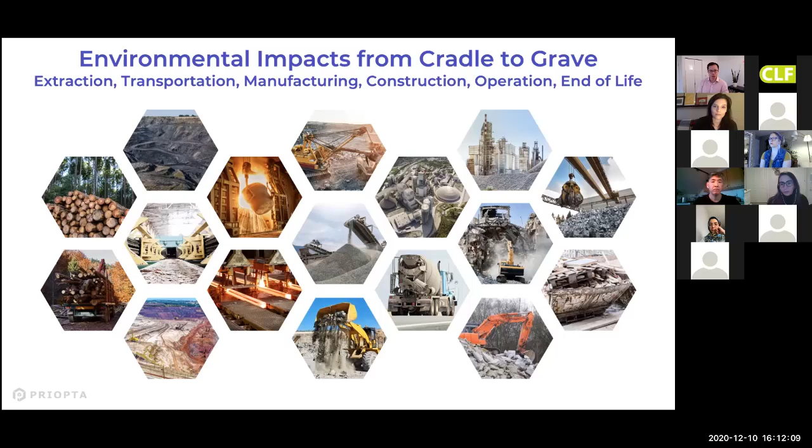These pictures illustrate some of those impacts. What's the impact of mining these resources? What's the impact of manufacturing and processing, et cetera? These are oftentimes hidden - they're not things we observe readily when we're looking at, let's say, a piece of concrete, but there is a whole history to it. How do we account for that?

As I mentioned earlier, the building sector is responsible for about 39 to 40% of global CO2 emissions. If you look at the annual emissions each year, about 40% pertains to this building sector. 28% is to operate all the buildings on the planet - think of what it takes to heat, cool, and operate every building. That's 28% of CO2 emissions. Then think about how much new construction and renovation takes place each year - the embodied carbon emissions associated with all those construction materials for new builds each year is 11% of global CO2 emissions.

This is what I refer to as the blind spot - this 11% slice of the pie. This is what we've historically neglected. We don't typically quantify it on projects, but it is actually extremely significant.

What's interesting as well is that when we talk about embodied carbon, we're talking about concrete, steel, aluminum, and a bunch of other materials. The building industry is a big user of these materials - even just these three, concrete, steel, and aluminum, together make up almost 23% of global CO2 emissions. Obviously the building sector is not the only user; these materials also go towards infrastructure, cars, and other products. But what's interesting is that if we address embodied carbon, we have the potential to affect the supply chains, which then has a ripple effect even beyond the scope of the building sector. If we can get lower carbon concrete mixes, that'll impact infrastructure as well as the building sector, for example.

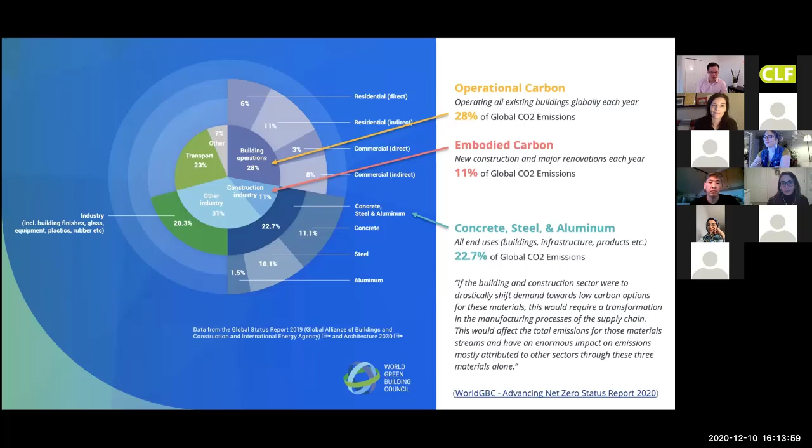If we only look at the new construction taking place each year between now and 2050, over the next three decades, embodied carbon will account for almost 50%, almost half of the emissions associated with that new building stock over that time horizon, with operational carbon being the other roughly 51% of the impacts.

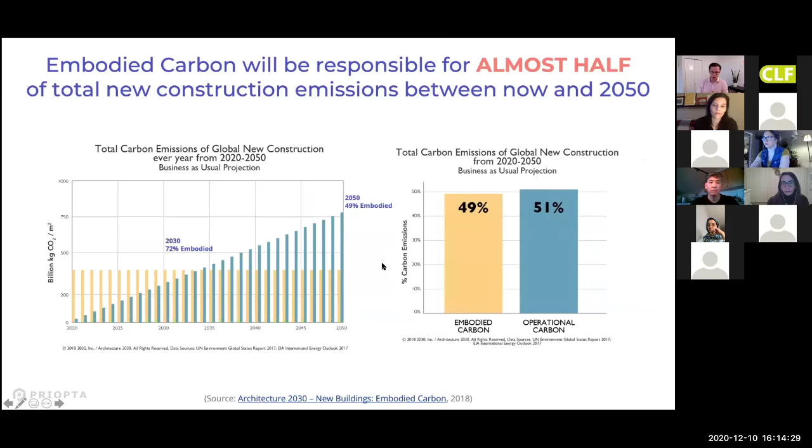So it's clearly a really significant source of emissions, but also important to consider in context is how much new construction we're projected to build. At our current rates, the projection is that we're going to double the current building stock by 2060. In the next four decades, think of all the buildings that exist on the planet, all the square footage of buildings - we're going to double that.

So we can't hit any of our climate targets if we don't address embodied carbon emissions.

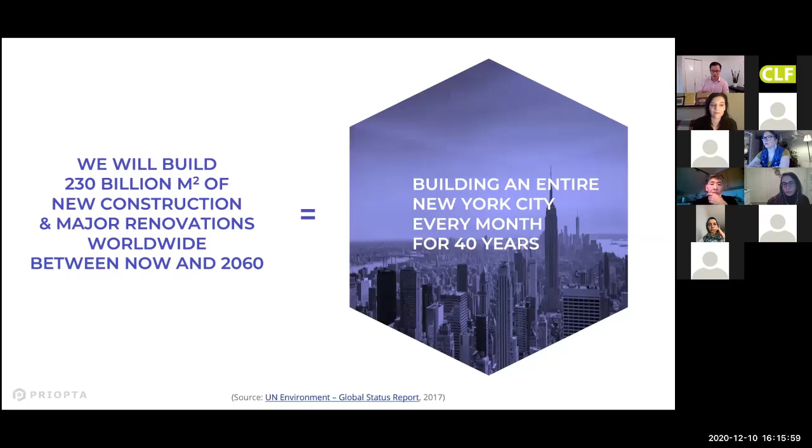So put that in a different context, we're building the equivalent of an entire New York City every month for the next 40 years. So think about all the buildings that exist in New York City, and not just Manhattan, that's all 5 boroughs, something like 5.8 billion square feet of floor area. That's how much we're building every month for the next 40 years.

And so naturally you would think we're obviously using a lot of the material supply in the world. So this is actually a snapshot of how we use resources on the planet. This is the total flow globally, by mass, of what type of resources we use, like minerals, ores, fossil fuels, and biomass, and how that flows to our end uses. So for example, the construction sector accounts for about 44% of the global material use. So almost half of global material use goes towards our buildings.

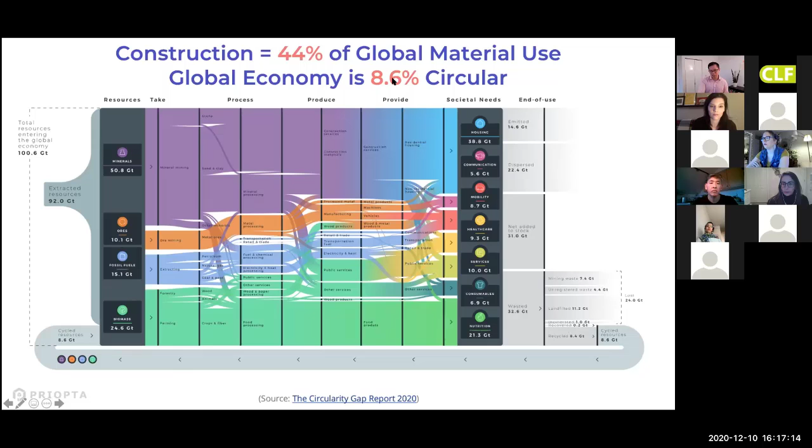And you've heard a lot of talk about circular economy. As a planet, we are about 8.6% circular, meaning 8.6% of the mass of resources comes out at the end of the lifespan and then gets cycled back, either recycled or reused in our society. And so that's a fairly small percentage, and it's actually decreasing because the amount of demand that we have for new construction and new products is outstripping it. So this percentage is actually decreasing every year right now at current rates.

So how does this figure into the global climate targets? If we're going to hit the 1.5 degree scenario target, which a lot of scientists say we should be aiming for from a climate change perspective, that means that this year we need to peak global emissions. By 2030, in 10 years, we need to halve global CO2 emissions. And then by 2050, in 3 decades, we need to get to 0 emissions. And then we need to go negative, which is extremely significant, right?

And to give you a sense of the percentage reduction we need each year, to hit that 1.5 degree scenario target, that's 7.6% per year. To hit the 2 degree target, that's 2.7% per year. Some early estimates back in April, actually even some of the most recent estimates that I've seen for the emissions reduction this year due to COVID, due to all the shutdowns and the slowing of the economy, that's about 7 to 8% this year. So this year we're maybe on track for that 1.5 degree target, but think about what we need to do for each successive year. Obviously these are not sustainable reductions, they're kind of a temporary reduction.

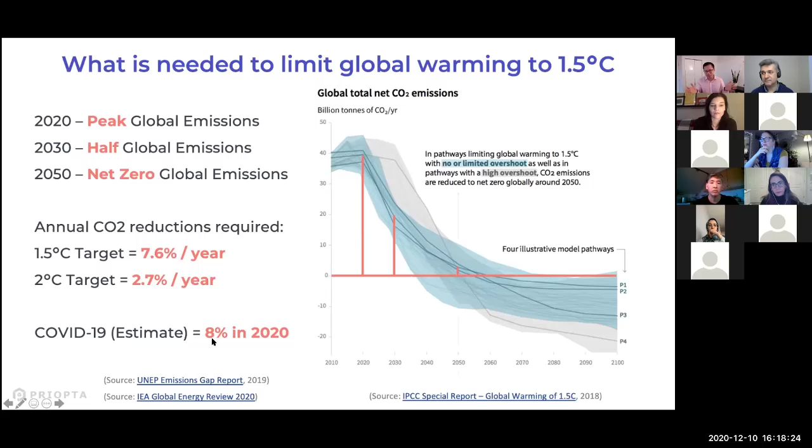And it's important for Canada as well. When we hear about climate change, sometimes we think it's going to impact other places more than us, but actually Canada is warming at twice the rate as the rest of the world. So whenever you hear these scenario targets, like the 1.5 degree scenario for the globe, that's a global average. That means Canada is probably averaging 3 degrees because we're warming at twice the rate as the rest of the world. And that's an annual average. So think about what the monthly variations might be, the peaks and troughs of that. It can be quite significant.

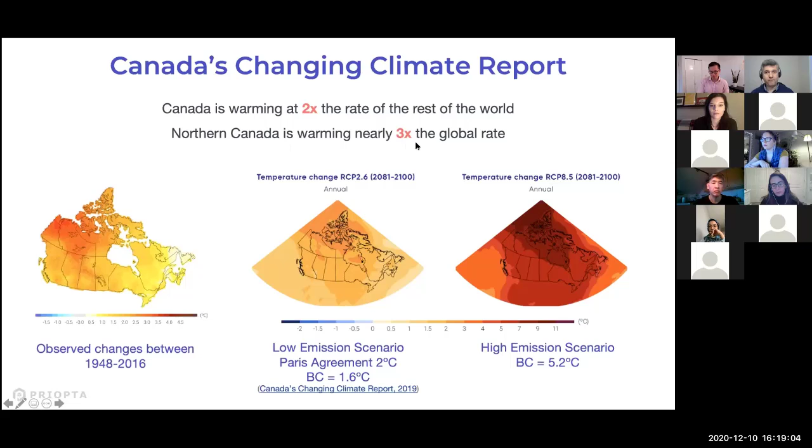So there's big implications for our country. And then especially when you get further into the north, like the northern Canada region, it's warming at 3 times the rest of the global rate. So that's kind of the global context for why we need to address embodied carbon.

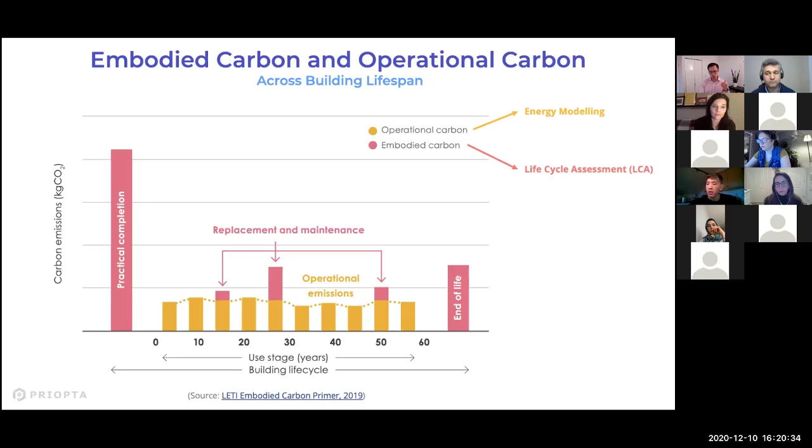And to quantify the embodied carbon, that's where we use life cycle assessment. So LCA is kind of analogous to energy modeling. You need to add these 2 scopes of emissions to get the holistic picture of the total emissions for your building. And when we're looking at life cycle assessment, you hear a lot of talk about embodied carbon, but in an LCA, we actually look at multiple environmental impact categories, not just carbon emissions.

And so we look at global warming potential, GWP, which is oftentimes referred to as embodied carbon. So that's the main figure that a lot of people pay attention to. But we also look at things like acidification potential, eutrophication potential, smog formation, depletion of non-renewable energy, and ozone depletion. So when we do an LCA, we quantify these other environmental impacts as well.

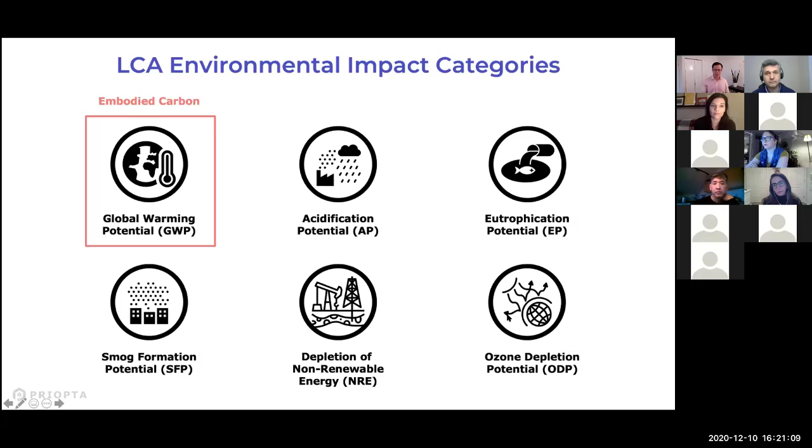I mentioned earlier about all those life cycle stages. So there's formal definitions for what each of these life cycle stages are. So broadly speaking, module A is the upfront carbon. So that's all the emissions before the building gets occupied. That's everything from raw material supply, so that's like the harvesting of timber, the mining of ores, then the transportation to the manufacturing facility or processing facility, and then transportation from there to the construction site and any emissions associated with the construction and installation. So that's A1 to A5.

And then the B stage is during the use phase. So if there's any emissions associated with, for example, refurbishments and replacements, that's what we account for there. And then at end of life, anything from demolition, deconstruction, transportation, waste processing, disposal.

Sometimes you'll also see LCA results that mention module D, which accounts for reuse and recovery and recycling. Those are benefits that are beyond the boundary of your individual building. So if, for example, you want to account for reuse for the next building or recycling benefits, or let's say you're incinerating some material and you're offsetting fossil fuel energy, for example, how do you account for those benefits? That's in module D, but we typically report that separately as additional information.

And if you combine the LCA results on the material side, plus the operational carbon, that's B6, that's the energy modeling results, for example, or your utility bills, those two combined together, it gives you your whole life carbon.

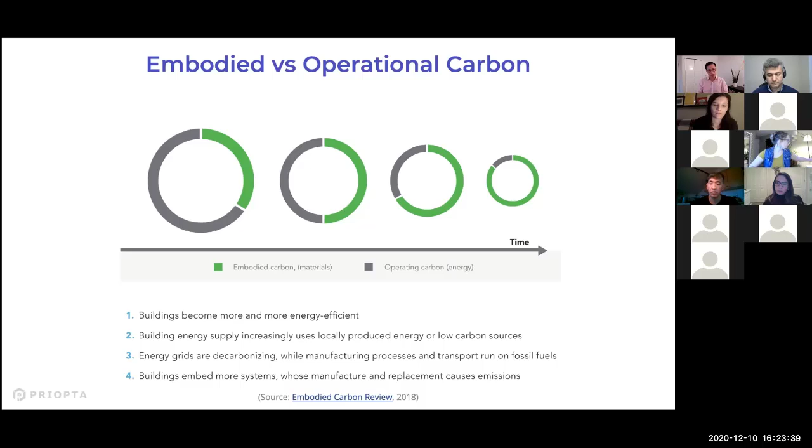So let's put some numbers to it. In BC, we have a fairly clean electricity supply. It's mostly hydro. So from a carbon intensity standpoint, it's very, very low. And so if we electrify our buildings in BC, we can actually have really low operational carbon emissions. And so you may have heard of the BC Energy Step Code. As you get to higher steps, we get more energy efficient buildings.

But this was a study done by Integral Group where they looked at part 3 buildings, so larger buildings beyond 600 meters squared. For these buildings, they actually looked at natural gas systems versus electric systems. And you can see our electric systems are really low. It can be as low as 1 to 2 kilograms of CO2 per meter squared per year.

And we have various different limits within the City of Vancouver, for example, in our rezoning requirements that limit the operational carbon greenhouse gas intensity. So those are really low numbers, right? And let's say a typical building in Vancouver maybe is more in the range of 20 kilograms of CO2 per meter squared.

So something that maybe uses natural gas and is not particularly energy efficient, that might be in the 20 range. But we can see there's big variations. Let's say a baseline building in Calgary could potentially be like 71 kilograms of CO2 per meter squared per year. So every year to operate the building, let's say something in that range, right?

In Calgary or in Alberta, there's a lot of natural gas heating. Also, the electricity grid is much more carbon intensive. There's a lot more coal use and natural gas use. So that changes the picture quite a bit. Plus, the climate is also much colder there. So that also affects things. So we can see, even on the operational side, it can vary a lot.

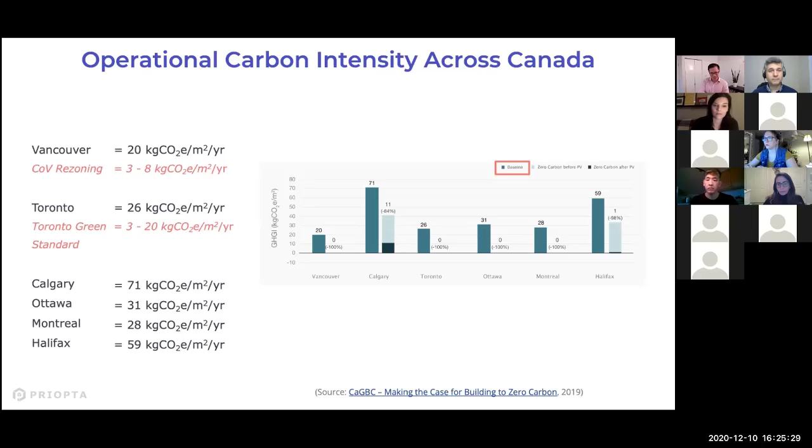I've seen numbers higher than 100 kilograms of CO2 per meter squared per year. And then it can be as low as like 1, right? Like in BC. So just to give you a sense of how big that range can be. And as I mentioned, the electricity grid carbon intensity is a big factor of that. So let's say in Alberta, the average carbon intensity of the grid is around 800 grams of CO2 per kilowatt hour. Whereas in BC, it's like 10 or 12 grams. So big variation there.

And so the electricity carbon intensity has a big impact on the operational carbon intensity of a building, but it actually also affects embodied carbon as well. Because if you think about the production processes for many different materials, some of them are very electricity driven. And so then the carbon intensity of the electricity grid will affect that a lot.

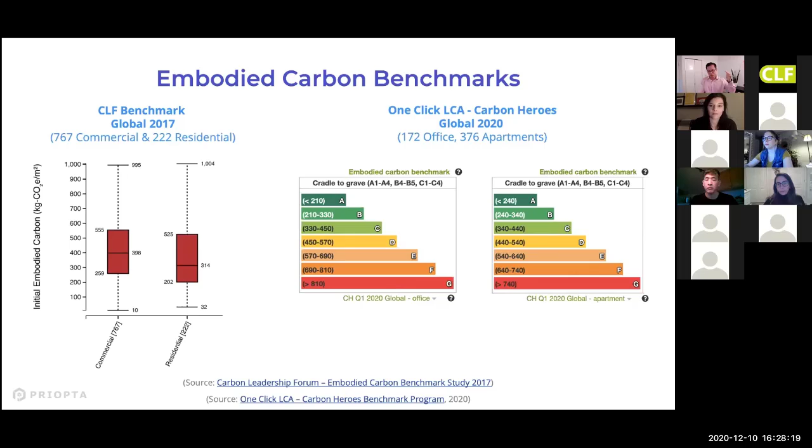So next, I'm going to talk a bit about policies and standards. So what's the imperative for actually addressing embodied carbon?

We see that around the world, whether it's voluntary green building rating systems or regulations, there are many systems actually addressing embodied carbon in some form. Some just require disclosure, reporting of the emissions. Some actually have reduction requirements. What I see generally from a policy perspective, or even in voluntary rating systems like LEED, is there's two different scales at which they apply when it comes to embodied carbon.

One is the whole building level, looking at your whole project: what's the total emissions and how do you reduce it? Can you reduce by a certain percentage relative to some baseline? There's a whole series of credits within LEED or requirements like the City of Vancouver's policy at that whole building level scale. Then there's a range of other policies that address things at an individual material or product specific level, and how we quantify those emissions is through environmental product declarations.

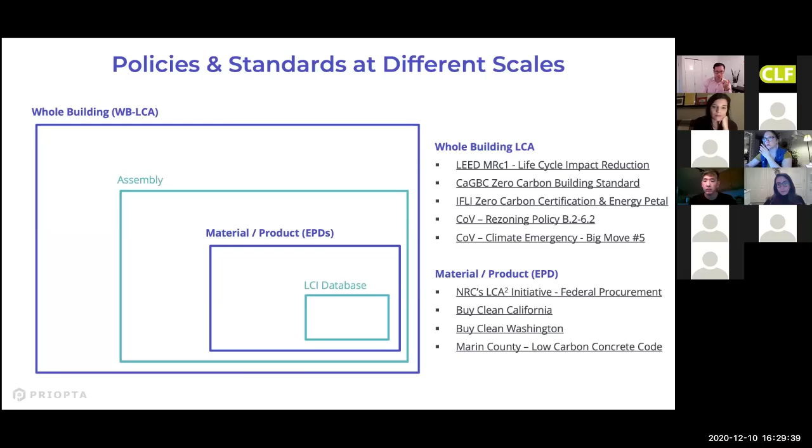If you're not familiar with that, EPDs are basically like food nutrition labels applied to products. In the same way a food nutrition label might say what's the health impacts associated with each serving size of a food product, EPDs report the environmental impacts per unit of a product.

So basically what's happening is, let's say I'm a concrete manufacturer or supplier. I want to do a life cycle assessment of my whole supply chain and my specific concrete mix. You can do an LCA, it's third party verified, and then they produce this document, which is published. Then you can actually see what the environmental impact, for example the carbon emissions per meter cubed of concrete, is for them. So that's what an EPD is - it's a reporting of the emissions associated with individual products.

So there's a suite of policies that tackle things at that level. For example, Marin County has a low carbon concrete code. There's a Buy Clean California policy as well that addresses a few categories of materials in California. There's similar efforts being pushed for in Washington, Buy Clean Washington, and even in the government of Canada, I think they're starting to think about procurement requirements at the individual material level.

So here in one slide, I'm trying to summarize some of the key ones that I think are relevant in Canada or that you may come across.

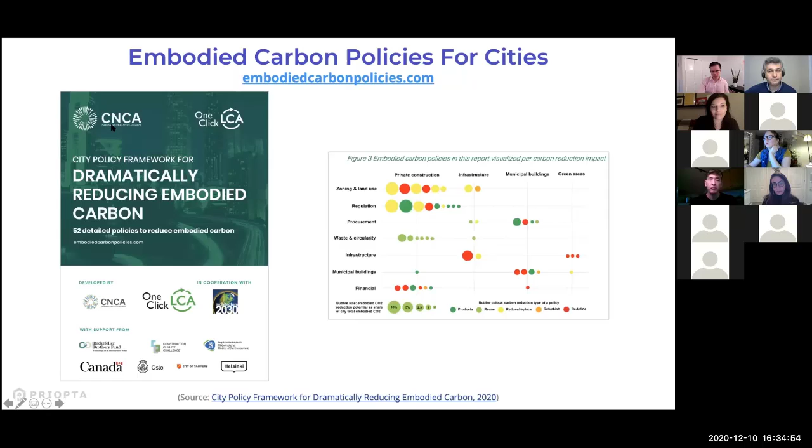Another resource - I actually think regulation and policy is one of the biggest drivers for addressing embodied carbon. So if you are working at a municipal, provincial, or federal government level, I highly encourage you to look at embodied carbon policies. It's a big source of potential reductions. If you have connections to people working in these various levels of government, you can send them this document. I think this document is actually really amazing. It was put together by the Carbon Neutral Cities Alliance, One Click LCA, and Architecture 2030.

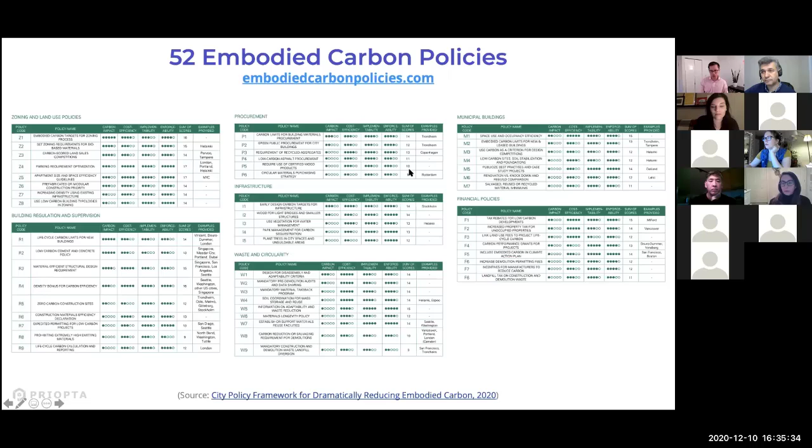What they've done is evaluate 52 different embodied carbon policies, and they have sample policy language. Where relevant, they also cite different cities around the world that have applied these types of policies. They affect policies at various levels: zoning, building regulation, procurement, infrastructure, waste and circularity, financial policies, or municipal buildings. So there's a whole suite of potential policies that may be relevant and can be adapted for each city. I highly encourage you to go to embodiedcarbonpolicies.com, download it, check it out, or share this with any government officials you know who may be interested.

Okay, now I'm going to talk a bit about LCA software tools, which is how we quantify these embodied carbon emissions. There are three main ones typically used in the industry, at least in North America. One is Athena, Impact Estimator for Buildings. It's a free tool, you can download it. It's Windows desktop software, and it's great for early design.

Let's say you just have PDF drawings, you do some simple area takeoffs. You can input those takeoffs into this tool and build up different assemblies - different wall assemblies, different floor assemblies - and do a whole building LCA that way. Especially at the early design stage, if you're trying to compare between different design options, I think this is actually a really great tool, and it's been an invaluable resource, especially given that it's free and freely available. It has mostly industry average data, so it doesn't really have manufacturer specific EPD data, but they do have industry averages for example, for concrete or wood.

Next we have Tally, which is a Revit plugin. So if you have a 3D BIM model of your project in Revit, this can be a helpful tool. Because it's a Revit plugin, you can map directly the different elements within your Revit model to the big database of embodied carbon emissions related to various materials in Tally's database. The downside is that because it's only a Revit plugin, if you don't have a Revit model, you can't do an LCA for your project. Or at earlier stages, if you don't have the Revit model yet, that also limits your ability to do an LCA. If you're trying to compare between different assemblies, you'd have to model it in Revit in order to map it and produce a result. So it's a bit more challenging in that sense, but it's potentially more accurate, especially at later stages, because you have a more detailed bill of materials.

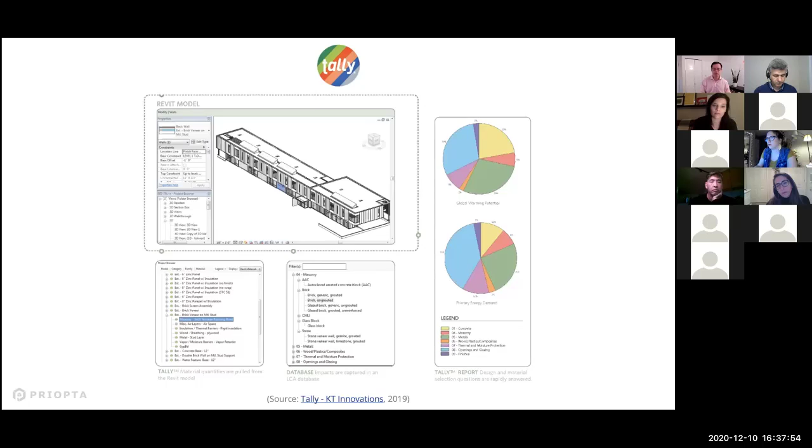Athena does not have a Revit integration, however they do have a spreadsheet import process. And then finally there's One Click LCA. I should mention Tally is a paid license, I think it's like $1,000 per year, plus you need the Revit license as well. One Click LCA covers the broad range of stuff - you can import data through spreadsheets, you can use BIM models, and it has both industry average data and manufacturer specific EPD data. So it's probably the biggest database of materials out there.

And then you may have heard of EC3, which stands for Embodied Carbon in Construction Calculator. It's a free open source database of all the publicly available EPDs. They have both industry average and manufacturer specific EPD data, somewhat similar to One Click LCA as well. However, this is not a whole building LCA tool in and of itself. For one thing, it only quantifies carbon emissions. It doesn't do the other environmental impact categories. And it's really meant more to inform tendering stage decisions, where you're comparing, for example, between different concrete mixes from different suppliers.

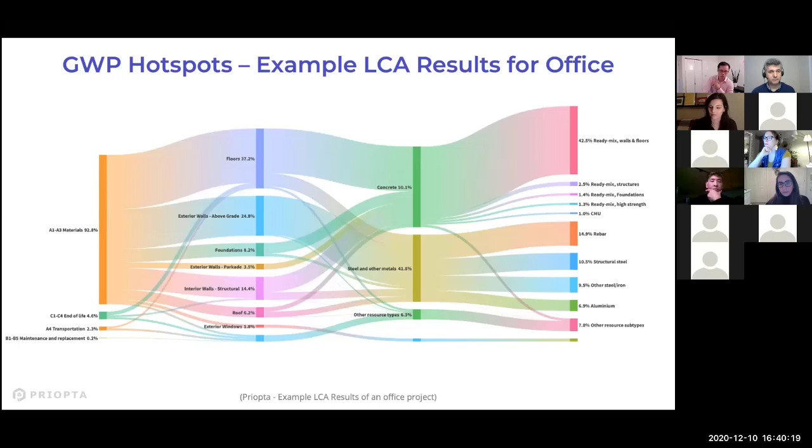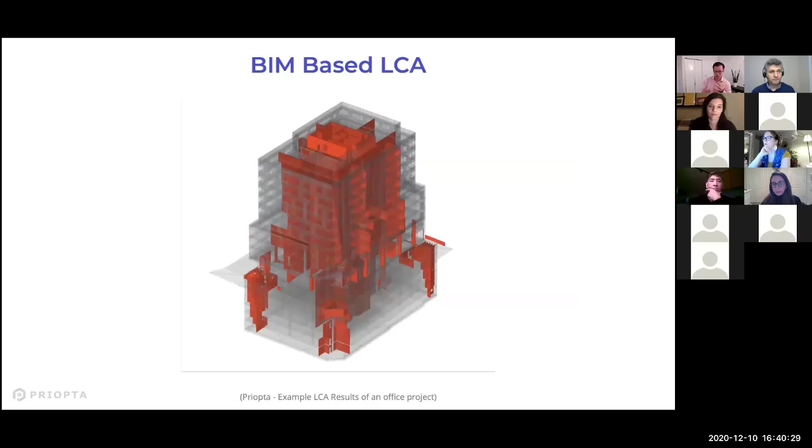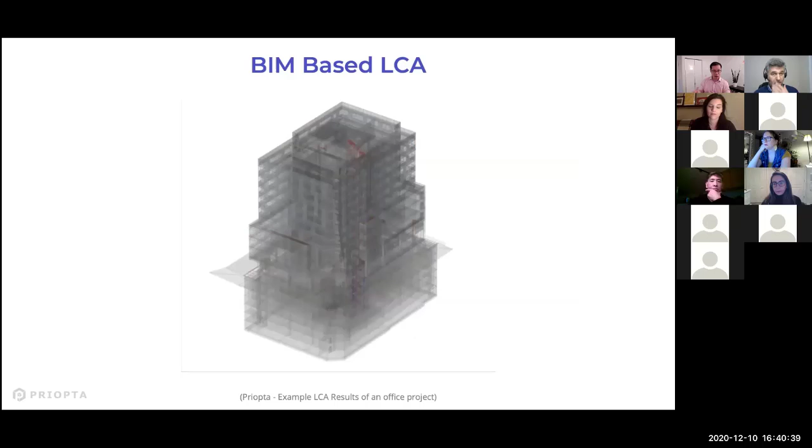So this is just a video of how working with a BIM model can be really helpful, but it also requires a lot of cleaning up sometimes. And depending on the quality of the Revit model, it sounds good in principle, but it can actually be more complex than you realize to accurately account for all the quantities. And some things may or may not be reflected in your Revit model, so it's something to watch out for.

Okay, so that's how you calculate it. Now I'm going to dig into how we reduce emissions, and I'm going to go through material by material, a lot of the key material categories where we have potential to reduce emissions.

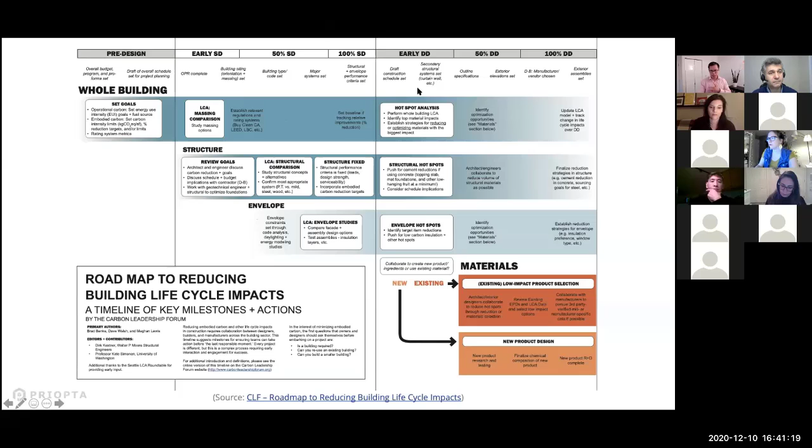Before digging into each of the individual materials, I encourage you to check out this document. This is from the Carbon Leadership Forum. It looks at how do we integrate LCA into the design process. So what happens at schematic design? What are the types of questions you should be asking on the structural side, on the envelope side? And then what are the considerations you should look at during design development or construction documents, during the tendering or bidding phase, and then during actual construction. So yeah, I just think this is a pretty well outlined roadmap. That's a great resource.

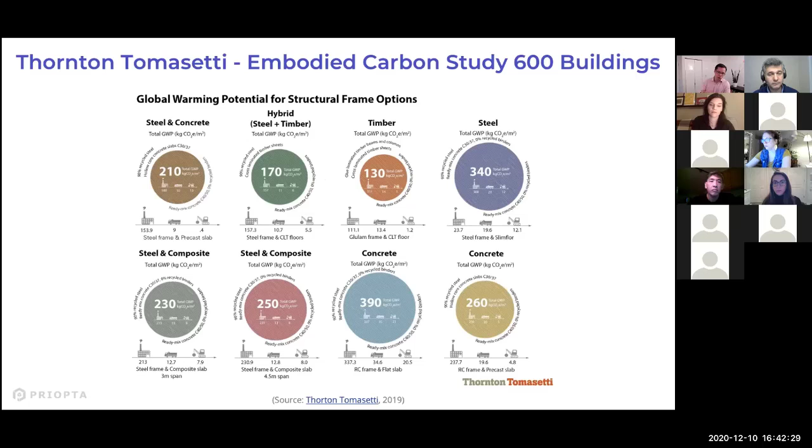So these are all the key categories I'm going to be going into.

Let's start off with concrete. The most emission intensive portion of concrete comes from cement. Cement is kind of the binding or glue of concrete, and it makes up about 10 to 11% of the concrete mix, but accounts for 80 to 90% of the overall carbon emissions of a concrete mix. So anything you can do to reduce the amount of cement content in concrete can have a correlating effect on reducing emissions of your concrete mix overall.

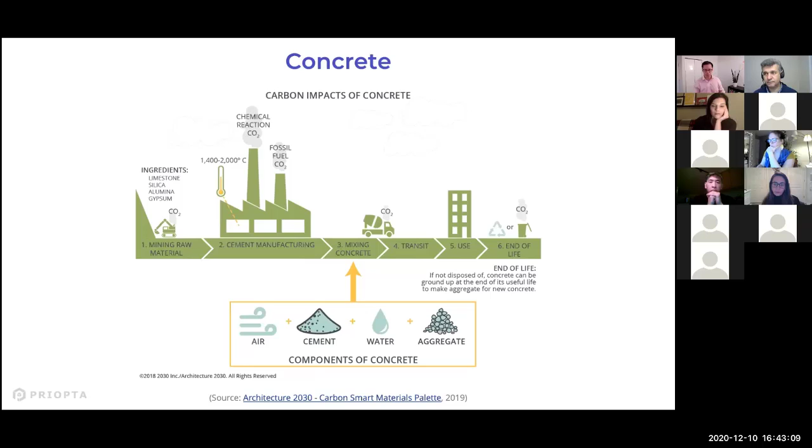So what are some of the key strategies? One low-hanging fruit is to use Portland limestone cement instead of regular Portland cement. Essentially they're adding a bit more limestone, reducing a little bit of the cement content, and that can lead to roughly a 10% reduction in embodied carbon.

Then you can look at things like supplementary cementitious materials, such as fly ash and slag, which can displace a little bit of the cement that's used. Roughly every 10% increase in SCM content can lead to roughly a 7% reduction in embodied carbon. Obviously you have to do the actual calculations, but this is just based on some of my high level rule of thumb analysis.

You want to go for performance-based specifications and avoid prescriptive specifications. Sometimes on projects you might have prescriptive specifications, like needing a certain minimum cement content, a maximum water to cement ratio, or a maximum SCM content. These things can sometimes prevent a ready mix supplier from reducing the emissions of the concrete mix they're delivering.

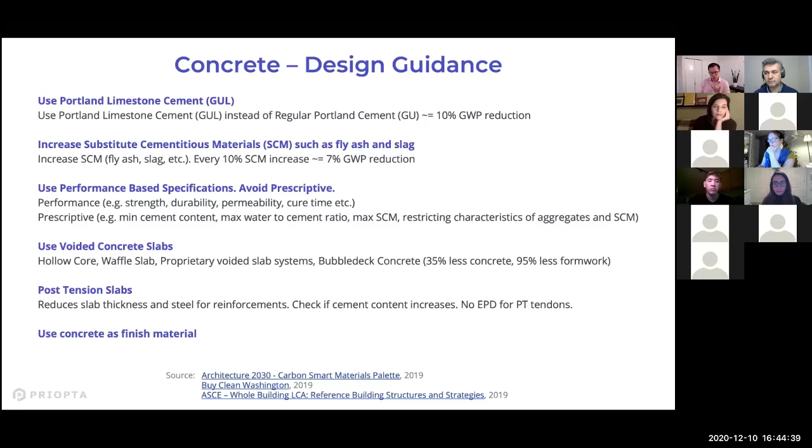You can use less concrete in your slabs, for example. Explore options like hollow core, waffle slabs, or Bubbledeck, which basically just reduce the amount of concrete in there. Sometimes post-tension slabs, which reduce the thickness of the slabs by using post-tension tendons, can also potentially reduce emissions. So those are a few strategies you can apply relating to concrete.

So there is potential to reduce a lot of emissions, and you need to optimize this for each element of the building—how high can you go on the SCM content for your foundation versus your above grade slabs versus your columns. That's something to discuss with your structural engineers and your ready mix suppliers.

Next up is steel. There are two main ways of making steel: basic oxygen furnace, which is much more emission intensive, and electric arc furnace, which is lower emissions, maybe roughly half. In the basic oxygen furnace, it's mostly virgin iron ore with very little recycled content, maybe 25% or less, and it accounts for about 71% of global steel production. Most steel, especially in Asia, is produced using BOF steel mills.

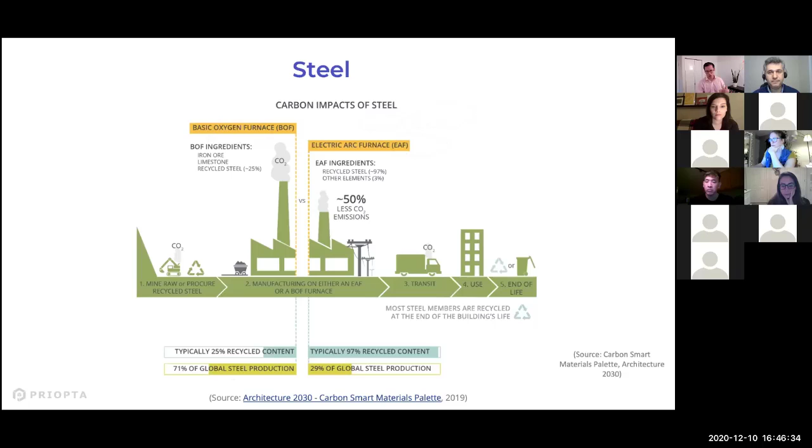Electric arc furnaces use a lot of recycled content, typically around 97%. Because it's an electricity driven process, it can really reduce emissions depending on the carbon intensity of the grid. If it's produced in a state or province with very low carbon intensity in their electricity grid mix, that can have a corresponding impact on the carbon intensity of the steel they produce.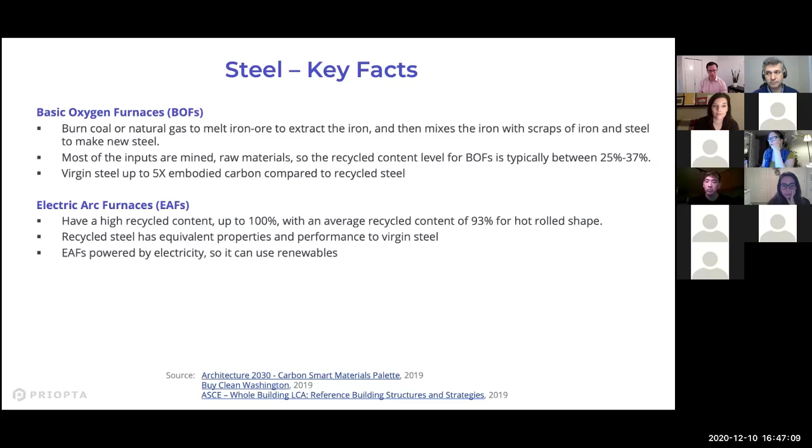So just generally speaking, try to understand where your steel is coming from and what process it was made in, and if you can, try to find electric arc furnace steel. Although the caveat here is that we're limited with how much recycled content steel there is, so it doesn't necessarily solve the whole problem. We still need to address how to reduce emissions in basic oxygen furnace steel as well. There are some new innovations coming online, maybe at research scale—I don't know if it's quite at commercial scale yet, but a lot of people are looking at how to reduce emissions of steel.

I'm going to jump past this.

Wood, generally speaking, when we do LCA studies, typically shows lower carbon emissions compared to steel or concrete structures. You'll oftentimes see case studies that compare wood buildings versus concrete buildings and what the percentage reduction is. It's very case specific—it depends on the building archetype and the specifics of the case study.

But also when it comes to wood and biogenic carbon—carbon relating to biomass, so things like wood or even fast growing materials like hemp—it can be a little tricky in terms of how we quantify those emissions. I'm not going to get into the details, but sometimes these studies account for a negative credit for the storage of carbon in the wood. So it's important to understand the assumptions of that analysis—did it account for negative carbon storage, since different LCA software tools have different assumptions around this.

I actually did a full presentation just on this topic, which is on our CLF Vancouver YouTube channel, which you can search up if you're interested in learning more. It's a pretty complex topic, but generally speaking, when we're doing LCA studies, it does show relatively lower emissions, but we need to ensure it's coming from sustainable forests, or that the forests are sustainably managed.

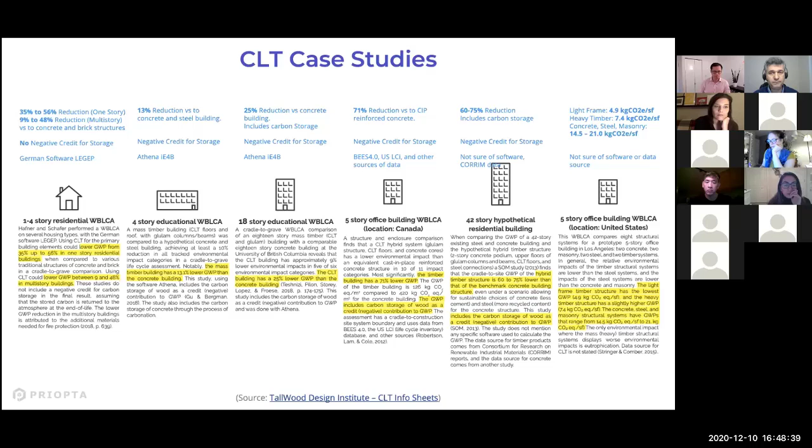Next thing is aluminum. Aluminum is an extremely energy intensive material—it uses 10 times more energy to produce than steel. And it's an electricity process, so even more so, it matters what the electricity source is when it comes to aluminum production.

What's interesting is actually Canada has the lowest carbon aluminum production in the world. We are the 4th largest producer, and because we use the latest generation of technologies in our aluminum production facilities, and where we produce aluminum—like in BC or in Quebec—there's a lot of hydroelectricity. So the carbon intensity is really low as well. Generally speaking, we have extremely low carbon intensity aluminum relative to the rest of the world.

That said, it still is very high—it's still a very high emission intensive material because it uses like 10 times more energy to produce. And there's not enough recycled aluminum to go around to meet global demand, so primary aluminum production, similar to steel, still does matter quite a bit. In your LCA studies, you'll notice that aluminum can actually be a fairly significant factor, especially when we're talking about facades or curtain wall assemblies. The aluminum used in the mullions can actually be really high impact, or aluminum framed windows—that's something to consider from an embodied carbon perspective.

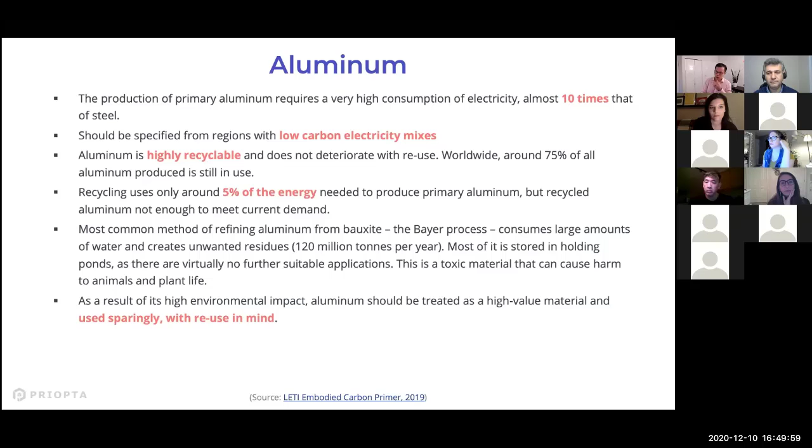Glass definitely still has an impact, so it's worth looking at, but it's not necessarily the biggest impact sometimes, even though there's quite a bit of glass that's used. But the framing options can really impact the performance on that front.

One note I'll say is that when it comes to analyzing things relating to the envelope, there is an interaction between operational carbon emissions and embodied carbon emissions, and you need to figure out what the balance is. As you saw earlier, the trade-off in Alberta is probably very different than in BC because of the operational carbon intensity. So you don't want to just optimize embodied carbon for the sake of it and neglect operational carbon, for example.

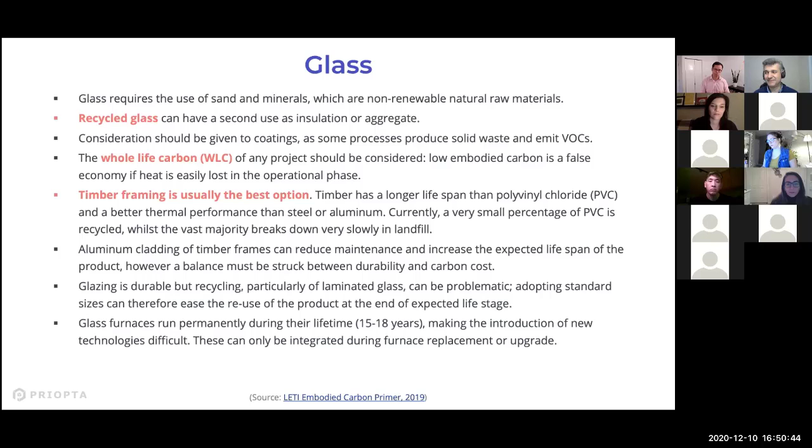Insulation is another one of those things that we need to do that trade-off analysis in. In particular, I want to draw your attention to XPS and spray foam insulation, which has fairly large embodied carbon emissions, mainly due to the blowing agents used. At least currently, they use HFCs, hydrofluorocarbons, which are like refrigerants—thousands of times more impactful than CO2. So small trace releases of these gases can have a huge climate impact.

That's why you can see the emissions I'm showing you across many different types of insulation—XPS, spray foam, EPS, polyiso, mineral wool, fiberglass, cellulose—many different types of insulation from R5 to R60.

You can see XPS and spray foam just by the yellow bars, they're very, very high. Sometimes they're almost like an order of magnitude higher. So it's important to look at the blowing agents in the insulation.

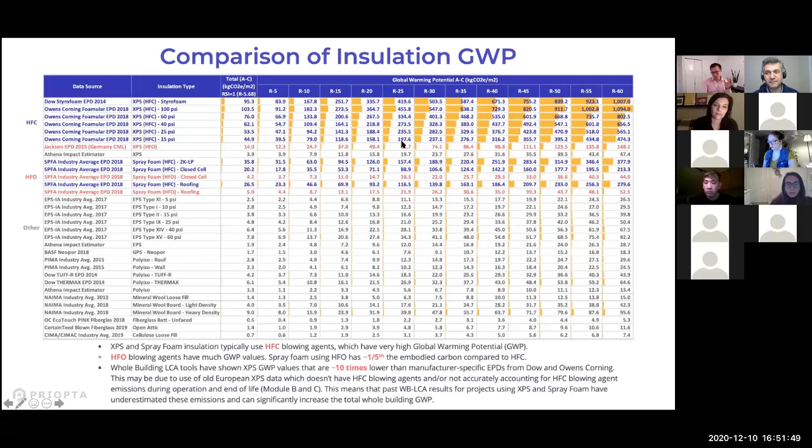But the good news is we are phasing that out. There will be new regulation in Canada next year. So all of Canada will be banning these HFC blowing agents. So there's going to be new products coming online. So that's something to keep an eye out for.

Okay, you may have heard of this book called Drawdown, which is looking at what are the key ways of reducing or reversing global warming. I'm tripping over my words, but what are the big strategies, right? So when you think about the key solutions to solving climate change, many people will think of things like solar, wind, those types of technologies that we hear a lot about.

But what was really shocking was the number one solution that they had analyzed globally was refrigerant management. In terms of what had the greatest potential to reduce emissions, it was refrigerants. Because they have such high impact, like they're thousands of times higher impact, it's something that I think is a big blind spot for the industry that we need to really look at.

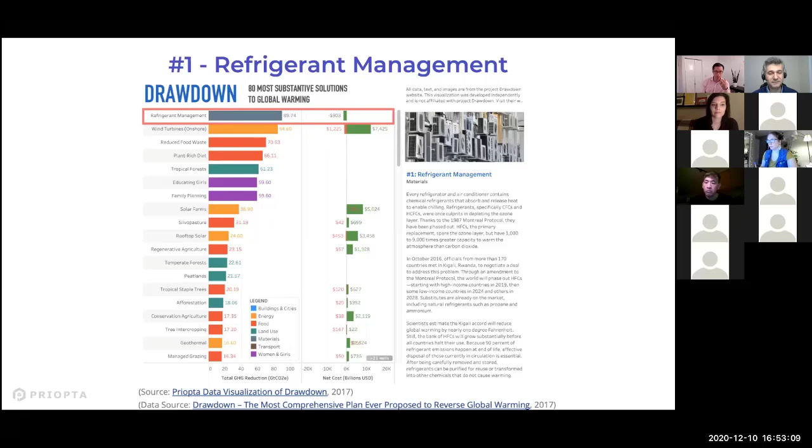And those refrigerants get used in our insulation in the form of blowing agents, but they also get used in our mechanical systems, which I'll speak a bit about soon. So, the number one is refrigerants. Alternative cements was number 36. So we talk a lot about concrete and cement, but there are also potentially bigger levers to really look at as well. Not saying we don't address cement, that's definitely still a big problem, but it's just something to keep in mind.

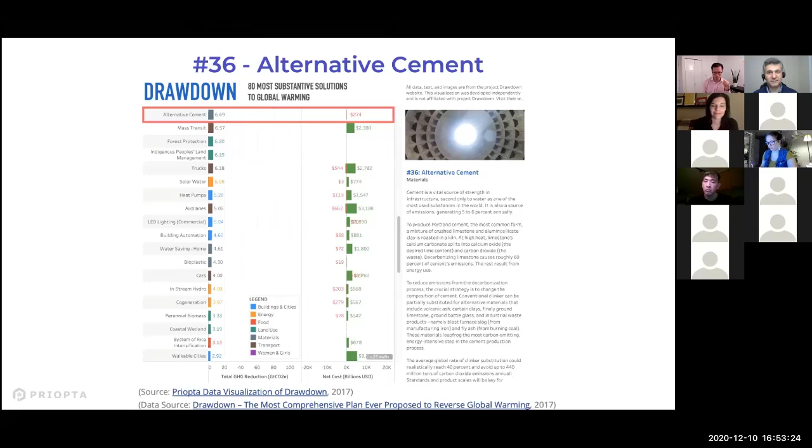So most statistics, whether it's the IPCC or our national greenhouse gas inventories or your EPDs, pretty much all assume 100 years. Why that's important to note is that these different gases have different atmospheric lifespans. So for example, you may have heard that methane is 25 or 28 times more impactful than CO2, but that's only over a 100-year time horizon.

The reality is that methane's atmospheric lifespan is something like 12 or 14 years. So it doesn't actually stay in the atmosphere for 100 years. So if we change the metric to 20 years, GWP 20, it would be 3 times higher. It would be 84 times more impactful than CO2. So that changes all of our calculus if we look at a different time horizon.

Same thing with refrigerants, because many of the atmospheric lifespans are under 20 years. If you compare the reported emissions, which assume 100 years, versus a 20-year time horizon, you can see they're typically 2 to 3 times higher. That means any numbers that you see, if you just want an order of magnitude, multiply by 2 or 3 times. That's the real impact, at least in the short-term horizon.

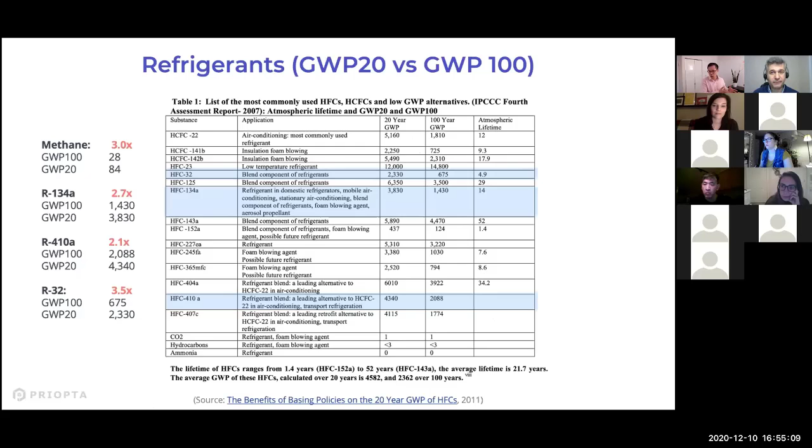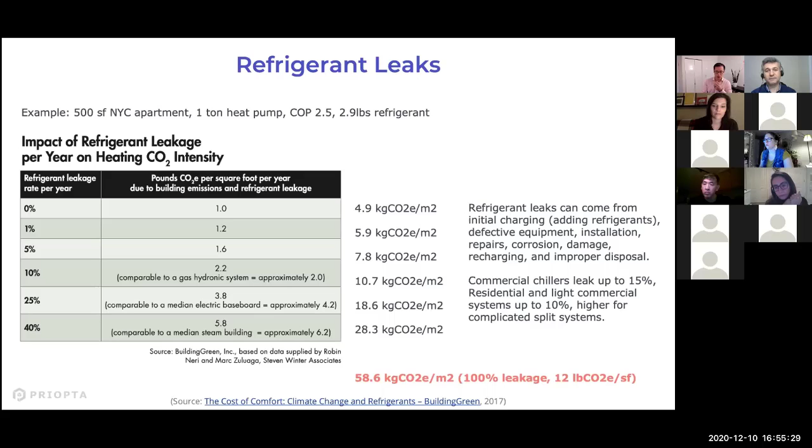And that matters because if you think about our climate targets and how quickly we need to reduce emissions, it matters when we're reducing those emissions as well. So refrigerant leaks can be quite high. I won't get into the details of this, but if you leak a whole system, like your heat pump or especially variable refrigerant flow systems, which have a lot of refrigerant charge, that can be quite impactful. There's a lot of uncertainty as to what the leakage rates are. So that's an area that we need to explore more.

And then there's also, we're not oftentimes looking at the emissions associated with all the MEP systems. So all the ducts, all the pipes, all the air handling units, there's all those materials that go into those mechanical and electrical and plumbing systems. We typically don't quantify that because we don't have good data on it yet. There's some research level studies right now that peg it at, let's say, 40 to 75 kilograms of CO2 per meter squared. Actually, the latest studies that I've seen from Integral Group, they peg it at 50 to 350 kilograms of CO2 per meter squared. So it can be quite high.

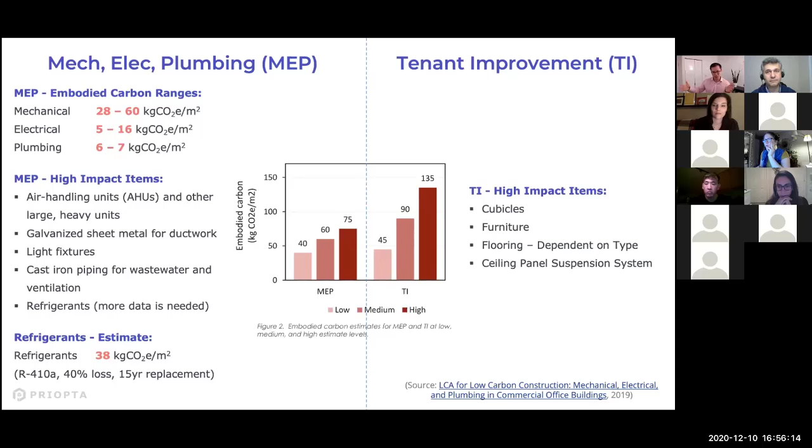And then there's the tenant improvements. In this study, they were pegging it 45 to 135. So this is like interiors. So things like cubicles, furniture, flooring, ceilings. And because these things have higher replacement rates, let's say you assume every 15 years you replace it, which is maybe a conservative assumption. You know, some commercial buildings, they probably have tenant improvements that are much more frequent than that.

Those, even though the initial embodied carbon of the interiors and the MEP system may be lower compared to the structure, if you factor in that replacement rate, depending on your assumptions on that, they can actually eclipse the total structural impacts over the whole lifespan of, let's say, 60 years. So it's something that we need to look at as well.

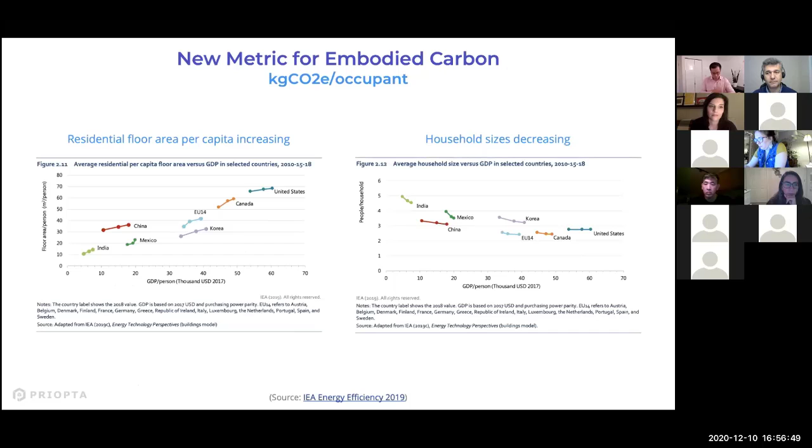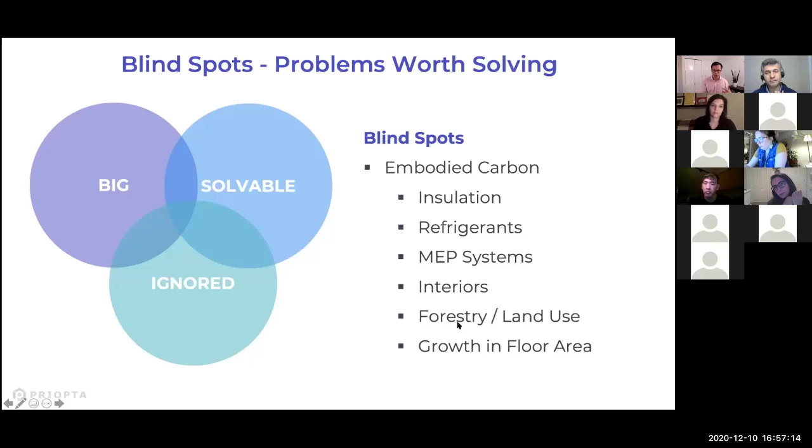Yeah, and then I'm just gonna speed through this. So all I'm saying is that, relating to embodied carbon, there's many blind spots. Embodied carbon itself is a blind spot, and I think there's a lot of room for emissions reduction because we haven't had much attention on this field for a long time. But even within this field, there's blind spots within the blind spots. So the insulation impacts, the refrigerants, MEP, interiors, forestry. Those are all areas that we're going to need to explore more, and we may find big opportunities to reduce emissions there.